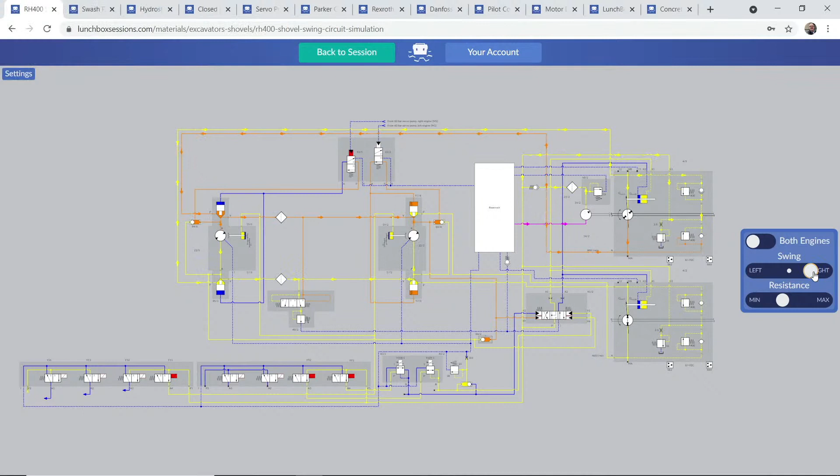Let's have a look at one right here on Lunchbox - studying a very complex hydrostatic drive. So that's one example.

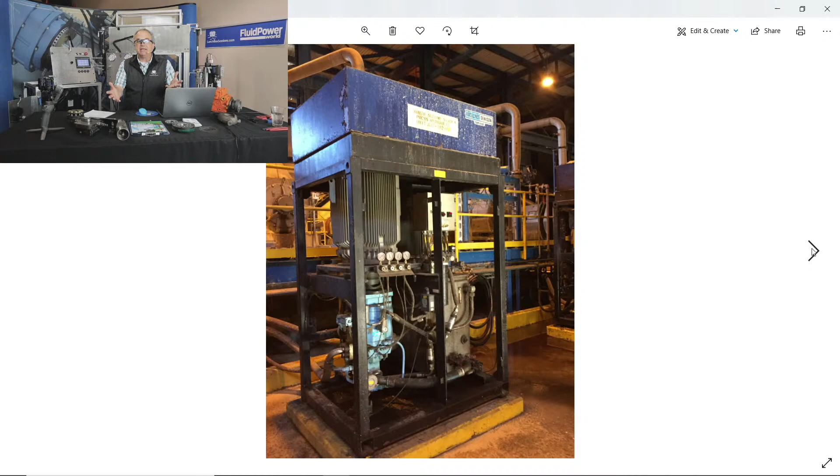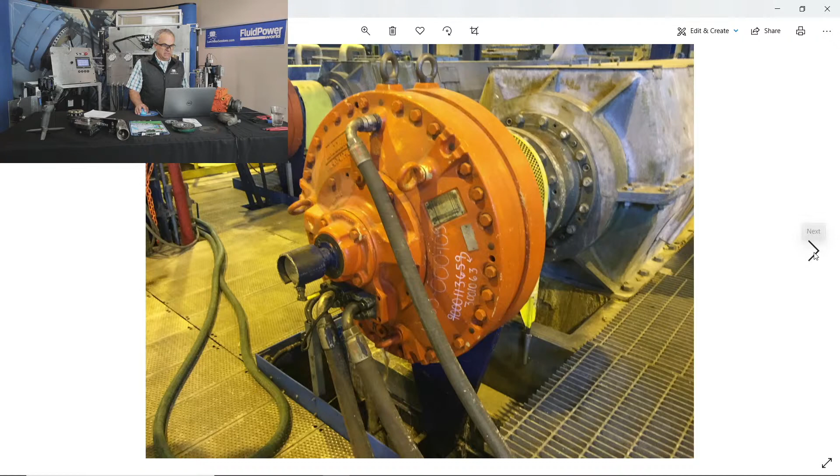So here's an example - this is from a pulp mill, for a very large machine called a pulp washer. We saw the pump, then the motor that the hydrostatic drive pump is turning. You'll see here a bank of pressure gauges with the very typical readings you see. On the right-hand gauge, port A pressure is at about 2,000 psi, giving us a clue as to which way the hydrostatic drive is turning right now - that's our working pressure port. Then return oil is coming back on the port B pressure gauge on the left side.

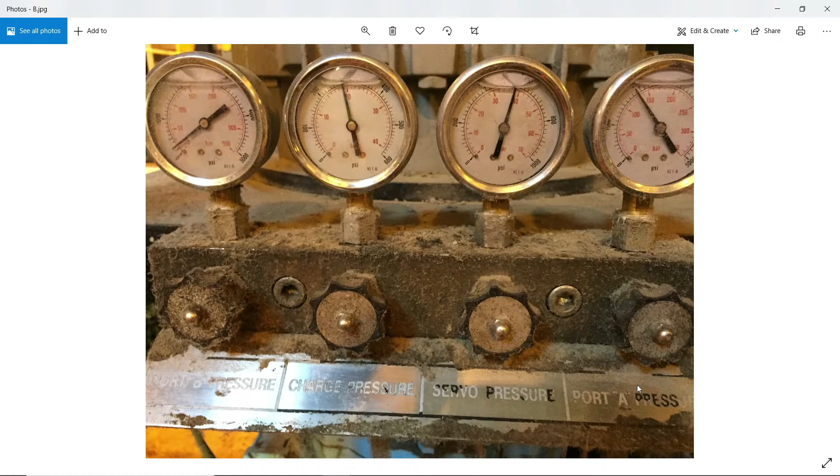And for those of you who know your hydrostatic drives well, you'll know that minimal pressure on the left side gauge for port B is not sitting at zero. That return side pressure is sitting at about 300 psi, which is coincidentally the same as the pressure value you could see in that second gauge from the left, the charge pressure gauge. Charge pressure and the return side of our hydrostatic loop are at the same pressure.

There's also a gauge for servo pressure, and we're going to get into how that swash plate is servoed into position in the big pumps. That servo pressure is right up there, close to 40 bar, approaching 600 psi. Some very typical numbers to run into, typical values and important aspects of a hydrostatic closed loop drive.

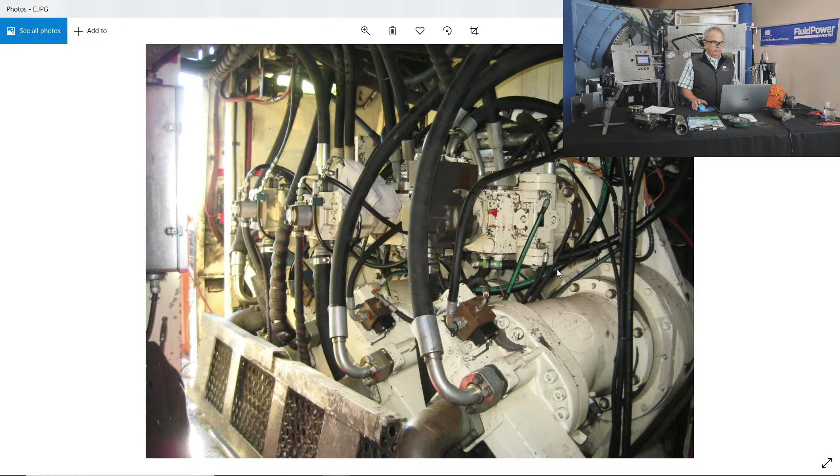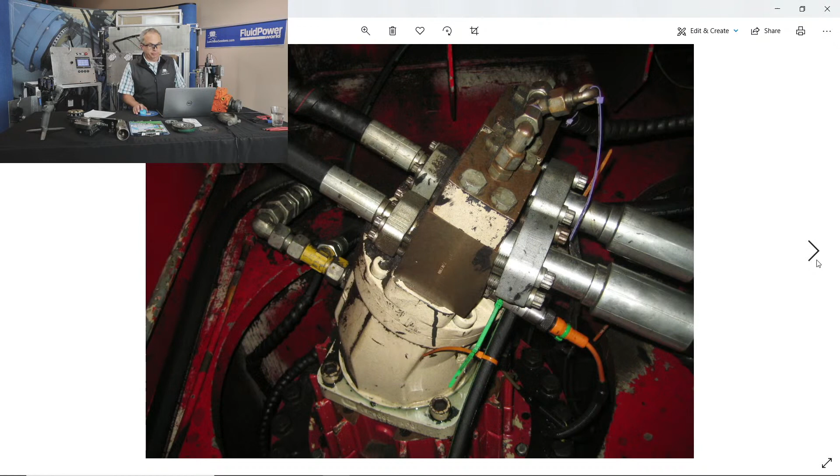Here's some photographs, the upper layer of pumps in white or beige color being used to power the swing drive on that example I was showing you in live schematic form just a few moments ago. So some hydrostatic drives have a very large scale. Here's a photograph of one of 6 swing motors for that model of shovel, where swinging the upper works of that shovel is a closed loop hydrostatic drive.

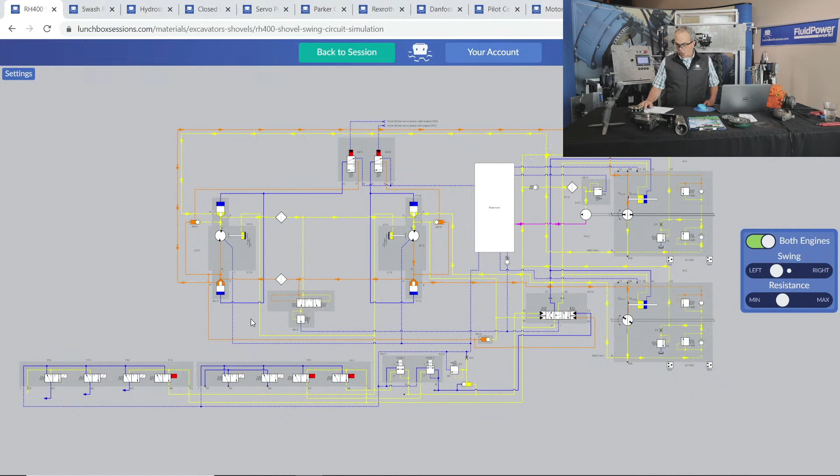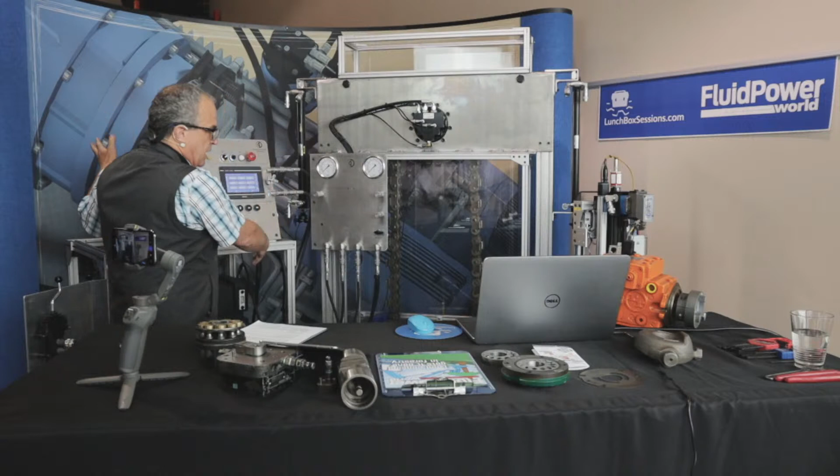All right, and so far I've been speaking to you about hydrostatic drives where the pump is always turning a hydraulic motor. You can see one here in our studio. We've got a hydraulic pump on a unit, and over here we've got a hydraulic motor that we're going to turn with the hydrostatic drive.

But here is my pop quiz question for the day, and we'll save the answer right to the very end. Perhaps some of you will know the answer, and we'll have some systems to tell us about in the chat column. Here's my question: is a closed loop hydrostatic drive always about a hydraulic motor, or can closed loop hydrostatic drives work with cylinders as well? That'll be our pop quiz question, and we'll save the answer to that to the very end of our live broadcast.

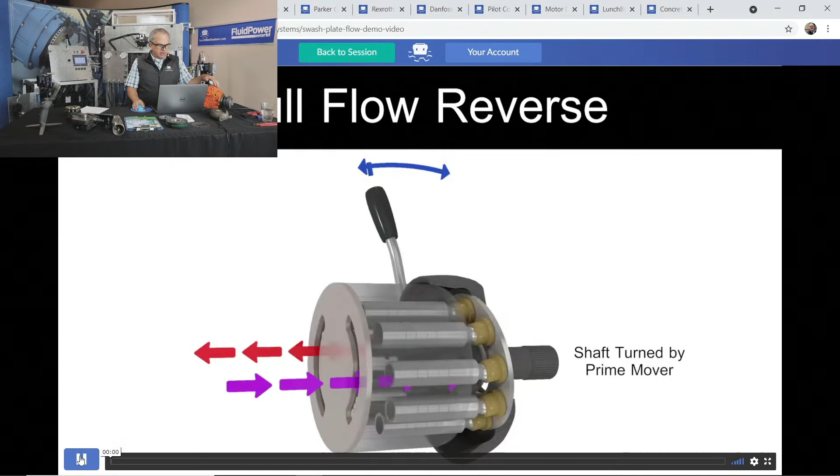But just to remind us of what actually moves the fluid and how that change in flow direction produces that very smooth forward and reverse action you get in a skid steer loader, if you've operated one of those, let's look inside the heart of the pump, just so that we remember the mechanical reality that we're working with: that cylinder barrel and its 9 pistons.

Here we are at mid-flow rate, full flow forward, back to center. Let's stop there for a moment. Pump at neutral. We're going to be talking a little bit about how much care it takes to keep a hydrostatic pump sitting in its neutral position, so that when the operator does not call for any flow, if the operator is running a skid steer loader perhaps and lets go of the sticks which return to the center position, wanting none of the wheels to be turning, how important is it for that swash plate to sit at that perfectly zero angle?

And of course, the cylinder barrel is still turning. That hasn't changed. If your engine or electric motor is still running, the pump is still spinning internally, but when the swash plate is at that perfect zero angle, then the pistons are no longer stroking back and forth from bottom dead center to top dead center.

Let's carry on and see our pump come back on stroke to produce low flow in the reverse direction. Look at those 2 kidney-shaped porting plates on the outlet of the cylinder barrel, on the outlet of the porting plate, to see that our flow arrows have reversed. Mid-flow in the reverse direction, full flow in the reverse direction. Our skid steer is going backwards about as fast as possible.

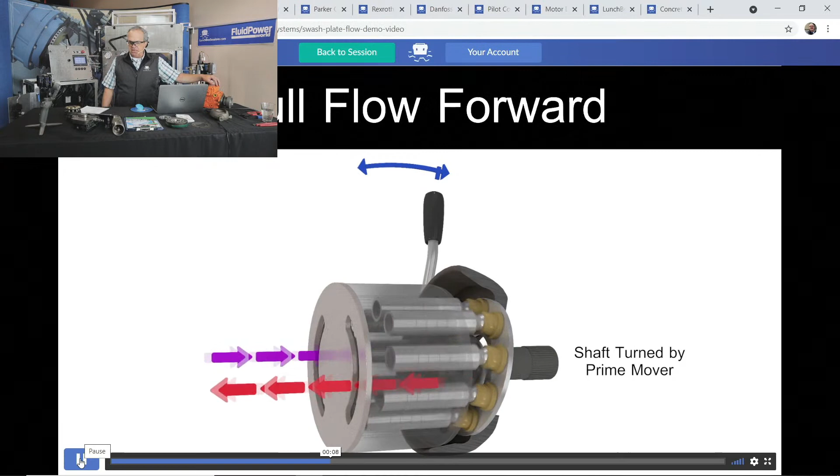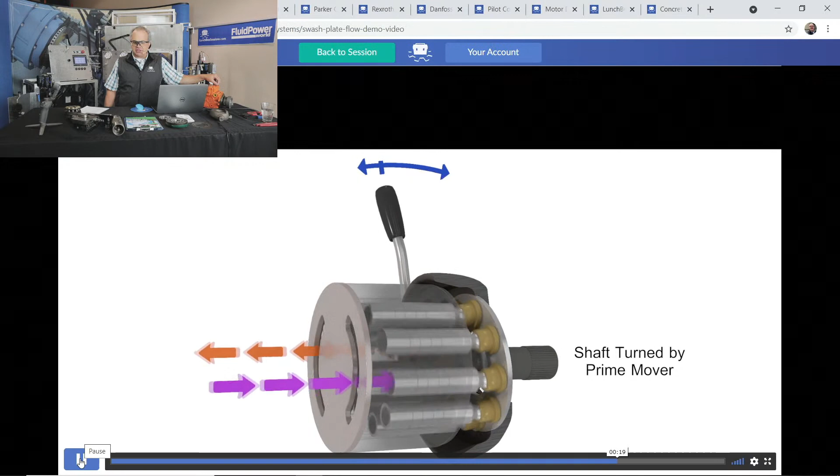Hey, we've got some additional participants from Tunisia. I think I know who that is. Oh yeah, Sammy has joined us. Mr. Sammy, welcome. Welcome participants, also additional participants from India. Good evening to you on that side of the world, it's later in the day there. Glad you could join us.

Pradeep has already said that he thinks perhaps hydrostatic drives can work with cylinders. Well, we'll see, is it possible to do that? All right, great.

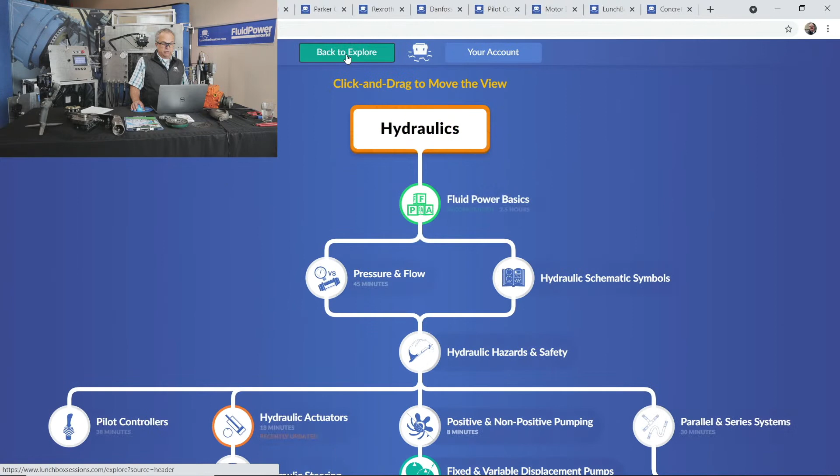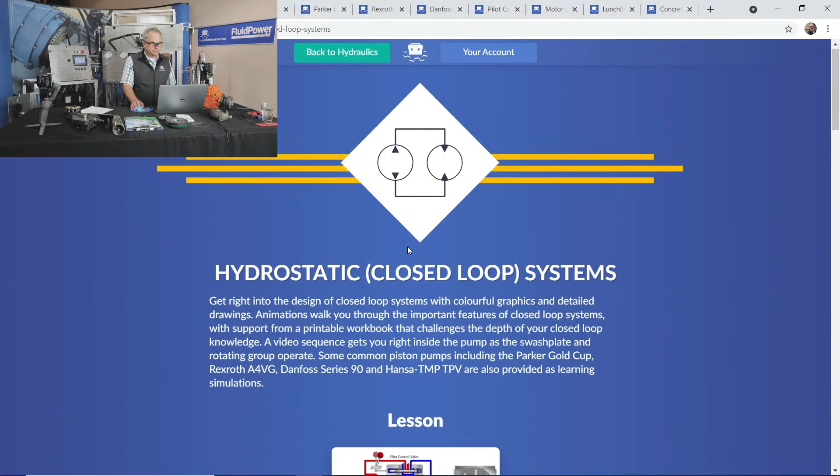Actually, what we'll do here is have a look first at a system you have access to. I'll show you where it is in lunchbox sessions if you've decided to play along. If you've got a demo account set up, that's all you need to interact with us in this material. If you're in our hydraulics menu, that's easy to find, then down low, just to the left of the middle, jump into hydrostatic drives there. Then when you scroll down past the lesson and the videos, you see our simulations, and the one I'll show you first is called the Hydrostatic Training Circuit.

Later on during this YouTube Live, that's the system that will be running live here in the shop. You'll probably also notice on our YouTube Live there are some links, perhaps on our website as well, to the actual model of hydrostatic pump and motor we chose for our demo today. But you get to run it.

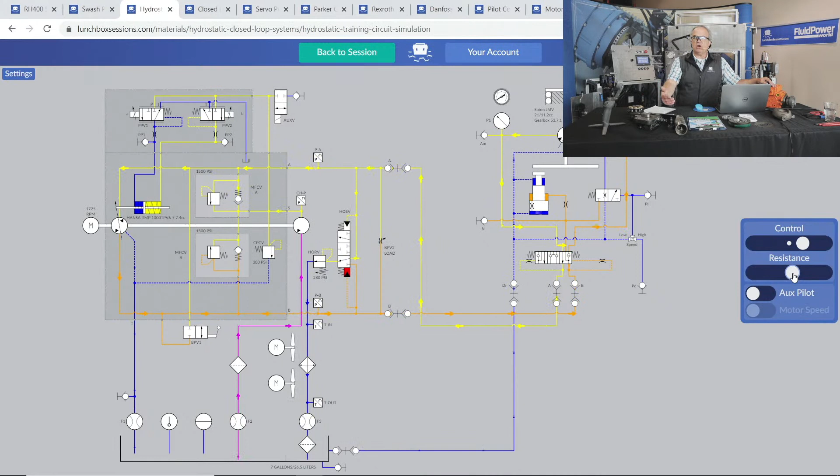You can run this system yourself by grabbing hold of that slider on the right-hand side there. You can add some resistance. Whenever you see a slider on our simulations that says load or resistance, that means you're making it tough for that hydraulic motor to turn, making it develop torque and turn a load that could be difficult, a winch perhaps, a conveyor, or a crawler machine that has to propel up a steep slope. That just introduces pressure from the working end of the system, from the motor.

So that is a hydrostatic drive that we run right here in the shop, and we'll make a bit of adjustments on it with you later on.

All right, hydrostatic drives all have in common the ability to move that controller over center. If you're watching that swash plate on the left-hand side of the simulation, close to a servo piston that's yellow and blue in color, that's moving our swash plate into position now, over to about the 1 o'clock position. You'll see that our flow has reversed, and now flow is exiting from the 12 o'clock position on the pump symbol, and our hydraulic motor is turning in the opposite direction.

You will also see the hot oil shuttle hard at work there, where you see a red pilot head pushing on what appears to be a directional valve. You'll see some flashing on and off on the solenoid that is piloting our servo piston into position to set our swash plate angle for the flow rate that we want. That flashing red is a simple depiction in our live schematics of pulse width modulation.

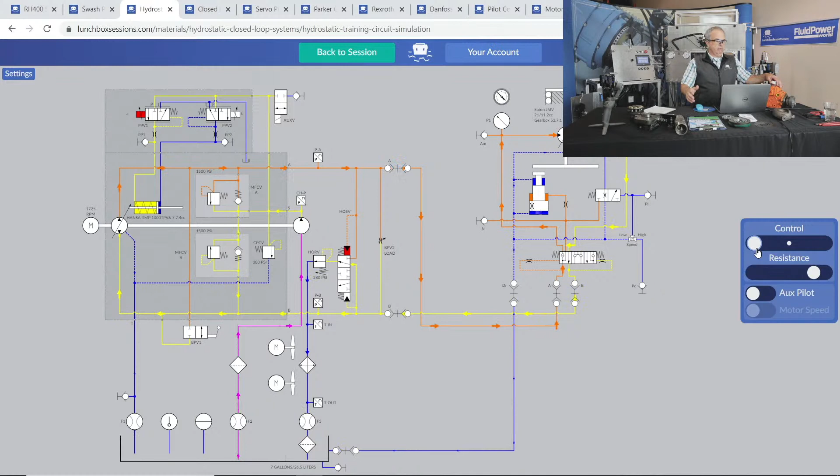Sliding that controller back towards the neutral position, you'll see in that same flashing solenoid, more time spent white and less time spent red. So a number of very typical features for a hydrostatic drive, and we'll come back to that one and do some more work with it shortly.

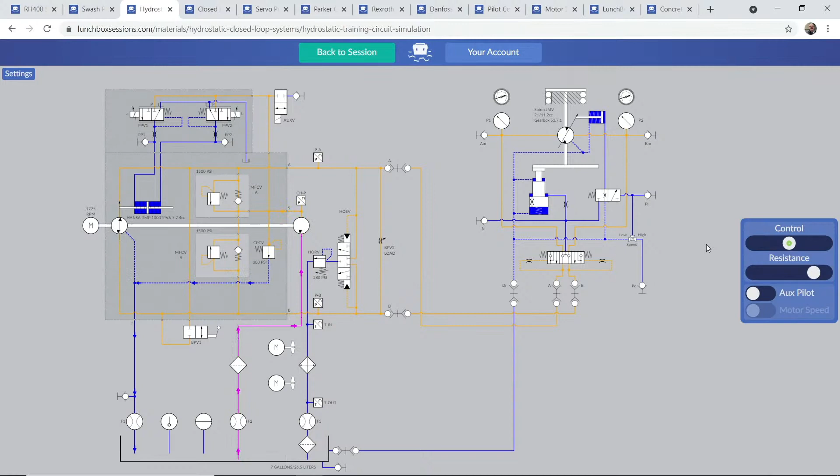Someone has already asked, Salim has asked, I'd like to know the pressure setting of an A4VG on a concrete pump. Well, I guess that depends, Salim. I would encourage you to look on the Bosch Rexroth site and look for the technical document for the exact series of pumps. That'll be after a slash in the model code. Check and see what size, what features you've got, and download that document. They've got some great documentation available at Bosch Rexroth, the makers of that A4VG pump, and lots of good materials to help you out with that.

But if you hang on a little bit, later on during this live, we will have a look at some very general aspects of the Rexroth A4VG. So do hang on to that thought, and we'll come back to it and think about that briefly. Good question. Good to get the pressure set right, and generally on an A4VG there are 2, even 3 very critical pressures that need to be set in the right order. I can't say that during this YouTube Live that we'll give you a definitive process for that, but we'll look at the pressure values in general.

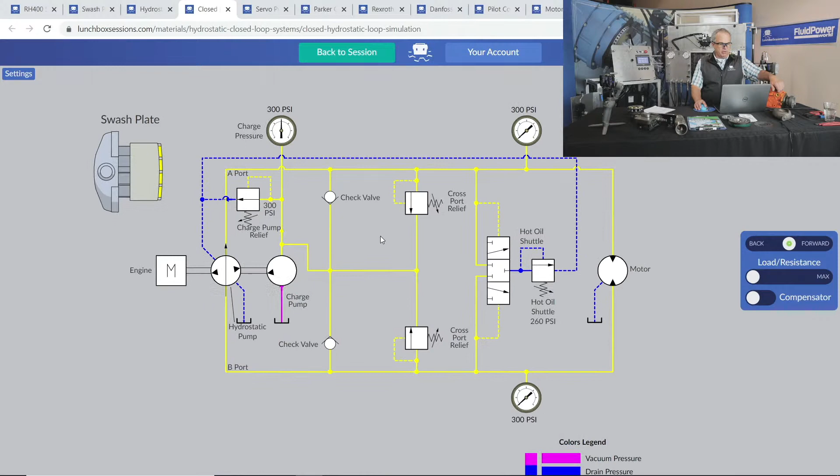So if we go back to session here, and you're playing along, you'll find out that you can also run one of our simulations by the name of ClosedLoop with hydrostatic in brackets, the very first one on our list of simulations. Jump in on that one, and I guess really this is probably one of the most popular schematics out there. In a way, it's everybody's hydrostatic drive and nobody's hydrostatic drive. It's very generic, and it's useful just to get some very basic teaching done.

So let's have a look at some of the basic features on this one, which is graphically about as simple as we can depict it. Let's move our slider here. If you're playing along, feel free to do the exact same thing with your simulation as I'm doing with mine. I'm going to move my slider for direction and flow to the 50% forward position. And that gets our swash plate moved over to about the 1 o'clock position. We're displacing perhaps at a half flow rate.

Now let's move our load resistance perhaps to about half value, just so that we have some pressure. That load resistance is all about making the hydraulic motor work hard, some counter torque, so that it has some work to do. It builds up some pressure in the system. And what you see now is a darker orange colored line from the pump at the 12 o'clock position to the motor also at 12 o'clock position, flow leaving the motor at 6 o'clock, and it's headed right back to the pump on the left hand side at the 6 o'clock position.

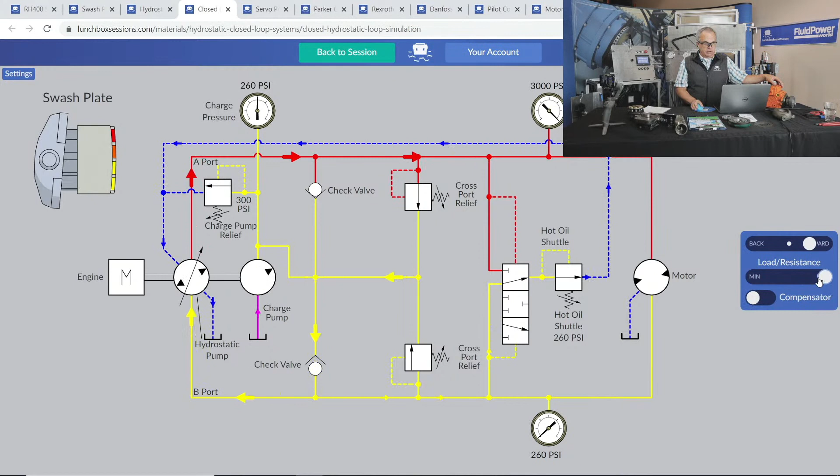Now, what do we figure is going to happen if we leave this machine parked up against the immobile object that won't move out of the way, and we leave the pump in drive? What's likely to happen? That's absolutely right, we're going to have some overheating issues. They're going to come pretty quick. So this type of system that just has cross-port reliefs, it's designed with the thinking that you will notice that you've bumped into an object that won't move out of the way, and very shortly after, you will move the machine away from that resistance and allow normal flow to resume. Cross-port reliefs can get the job done, but there's going to be overheating, okay?

All right, let me just check my list to make sure I'm following all the notes I had in mind. So that's a little bit on pressure control. We've touched upon a little bit of charge pump.

More on that in a moment.

Heat is a big issue, and we've already mentioned that. Sometimes if we go do work at a pulp mill, the maintenance superintendent will say, hope you guys are covering training on hot loops. That's another description for what they think of as their hydrostatic drive. They call it a hot loop. Is it true that hydrostatic drives tend to run warmer than many open loop systems?

Yeah, that's absolutely true, and it makes sense when you see that the fluid from the motor is constantly returning back to the pump, or at least most of it is. So this is a good time to think about that hot oil shuttle Jeff was mentioning. See that pressure on the top line, that dashed pilot line. That's not a flow line, that dashed line coming down to the hot oil shuttle. It's just a pressure line, and it bumps our hot oil shuttle down based on the high pressure side.

Let's follow oil leaving the motor, some of that oil, or perhaps more correctly, thanks to the charge pump that is pushing fluid into the return side. Which exact oil molecules are moving through the hot oil shuttle, the ones returning from the motor or the ones added by the charge pump? Doesn't matter for this point in our discussion.

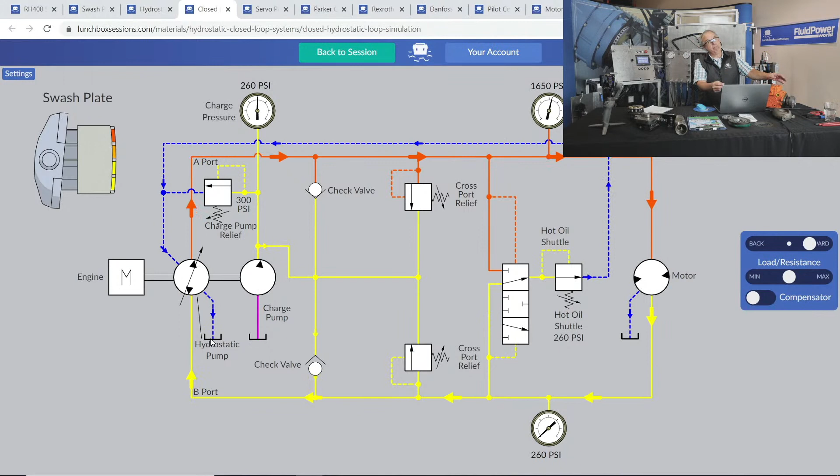While schematically it's depicted as on the bottom of the symbol, as most of you know, that final case drain is going to leave from a port on the top of the pump case. So schematic symbols and the way things get ported and built in the end aren't always a perfect match, right? It's a depiction of general flows and connections, and we don't have any port labeling. This is entirely a generic system for training purposes.

If I move my controller for the swash plate back to neutral and then move it into reverse, now you've got exactly the opposite flow action taking place. Oil is leaving the hydrostatic drive at 6 o'clock and moving over to our hydraulic motor and entering at 6 o'clock. Everything is happening in exactly the same way, just on the opposite side of the loop.

If we move that load resistance to max, bam, there's that same action again with our pressure valve, but this time the cross-port relief is on the bottom of the loop, and so there has to be two of them. Notice, of course, the check valves, which sometimes get referred to as makeup check valves. Other manufacturers refer to them as replenishment check valves. I think that's a term from the UK that's popular. All of those terms make sense.

It's oil from the charge pump being added to the return side of the loop so that there's fluid that can leave through the hot oil shuttle, and also to make up for oil that leaves the system on the case drain line of the motor, oil that leaves the case drain line of the pump, all of the losses. It's a closed loop system, and so all of the oil that leaves our main hydrostatic pump at 6 o'clock and eventually returns back into it, in this example at 12, all of that oil has to be maintained.

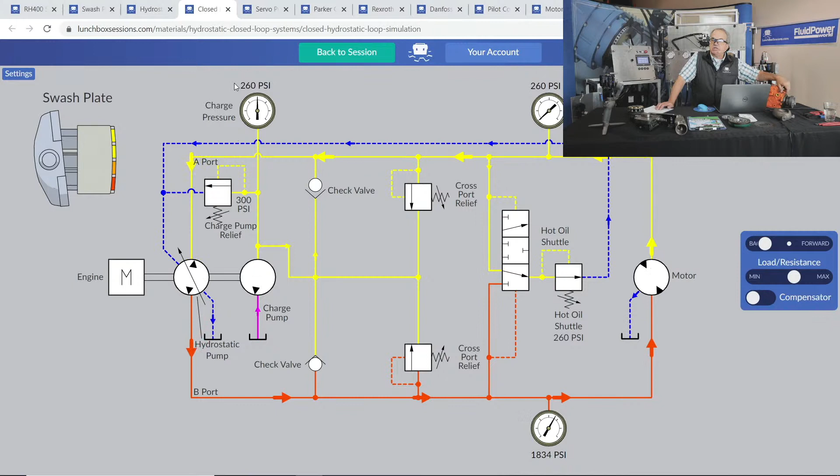Wow, yeah, so that's a really tricky discussion to have there, Dharmalingam. I'm not sure exactly how to give one answer for that. But yeah, hydrostatic drives can be very tricky to look after if there is going to be particle contamination. Probably some of the toughest systems to maintain that we bump into, from the point of view of filtration and particle cleanliness, comes in the oil field, where the coiled tubing units unplug the injector.

Which is the motor half from the pump - they uncouple it with quick couplers, and then they plug them back in when they're getting ready to do a service job, and it's a great time to introduce contaminants as those quick couplers come together, and now perhaps you've got contaminants stuck in the hydrostatic loop. So in machines like that, you will generally find very large elements so that the pressure drop through the filter isn't too great, but very large filter elements that are filtering one direction at a time - so two sets of filters, one on the A and one on the B loop.

Otherwise, a lot of case drain flows as they go back to tank should not be filtered, lest you get in the way and cause some back pressuring with that filtration that could cause damage to the pump or the motor. But then you may choose to have one of the most effective filtration systems out there, which is called a kidney loop - drawing oil from the tank on a special gear pump, usually whose only job is to do filtration, perhaps cooling, and circulate oil from the tank through a cooler and a filter and then right back into the tank, getting some assistance with fluid cleanliness in that manner.

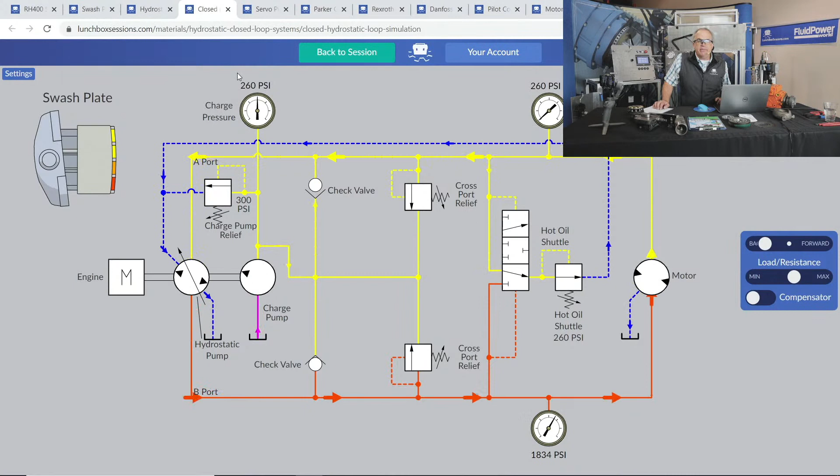And so then one does have to work at making sure cooling is taking place.

Jonathan was asking, what is the directional control valve for?

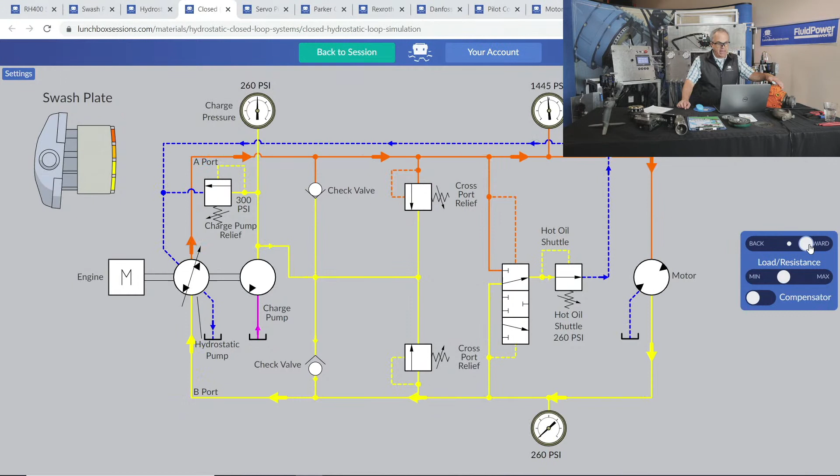Going back to our simulation, you're seeing that 3-port, 3-position directional valve there - that is the hot oil shuttle. It is bumped into position, piloted by the high pressure side, and flow exits from the low pressure side. That valve is just there to select the low pressure side of the hydrostatic drive loop and allow oil from that side to connect to the hot oil shuttle, allowing flow to go back to tank for flushing, cooling, and filtration. I hope that's the directional valve you were referring to, Jonathan.

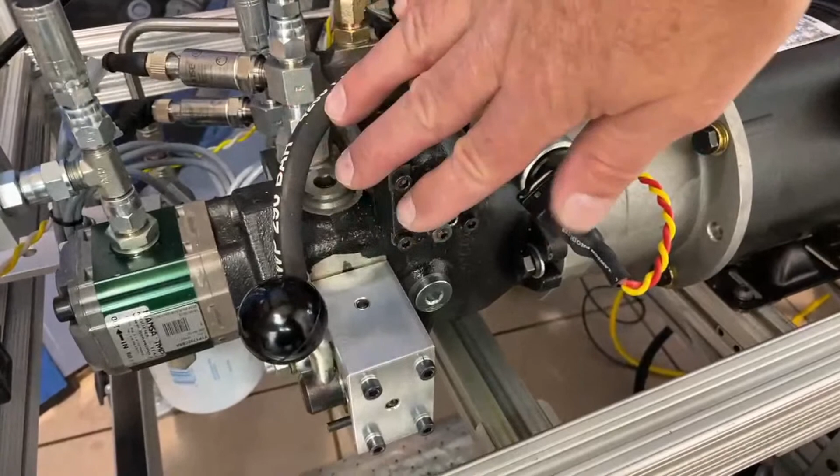Actually, ours does. I'll briefly jump over to look at our hydrostatic system. This is a pump I'm going to be running here shortly - this is the hydrostatic drive in our shop. It's just a wee baby that does 7.4 cc's per revolution at maximum on the main piston rotating group, with a gear-based charge pump.

This lever here is the tow bypass. If I push down on that lever, A and B ports are directly connected together. So if the machine is broken down but the pump is still connected to a hydraulic motor, the motor could turn and circulate oil through a bypass valve at the broken down engine and pump end. That will not try to turn the rotating group, the cylinder barrel, which will then not try to turn the prime mover and cause all kinds of resistance and damage. So that's a bypass option.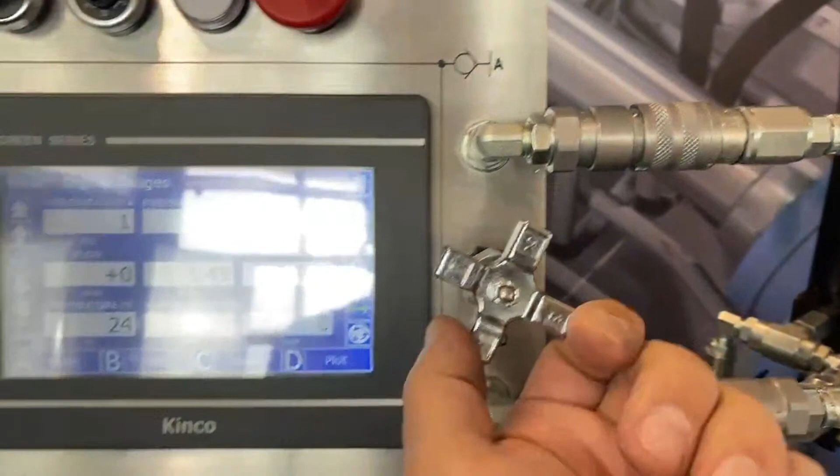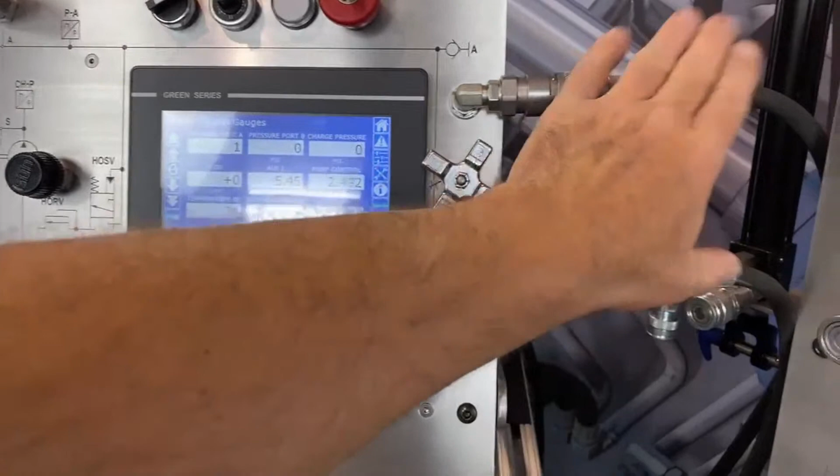I better put it back up into normal, otherwise I might forget later when we run that. On our training system, here's our main A port outlet and B port line that move over to our motor, but we also added a needle valve to give fine control to allow flow, which lets us do some work with a hydrostatic drive even with our hoses uncoupled and actually come on stroke. So yeah, the tow valve can be an important element, most certainly. I hope that's what it was.

Jeff is asking some questions about filtration - where's the best place to put them on a closed loop system? In line, yeah, so on those hydrostatic drives I was telling you about for coiled tubing injectors in the oil field, they put one on each side, generally located fairly close to the pump side of the hydrostatic loop. They've generally got that filtration happening as oil leaves the pump and heads towards the hydraulic motor. Oil on the return side bypasses the filter with a bypass check valve that's typically in that type of loop.

Brock Godfrey, hey, from Australia, welcome. Good to hear from you, sir. Good morning, Carl, he says. Love to hear your thoughts on... Yeah, it's morning for me. What time is it for you? My goodness, must be late there.

Love to hear some thoughts on performing volumetric pump testing on closed loop pumps, particularly in the field, still in the machine. Yeah, well, that can be a little tricky to do, can't it? Especially since if you have a hydrostatic drive that is turning in both directions, with so many swash plate control devices typically on a commercial grade pump. We haven't volumetric tested hydrostatic drives in the field per se. We test a lot of open loop pumps for volumetric in the field.

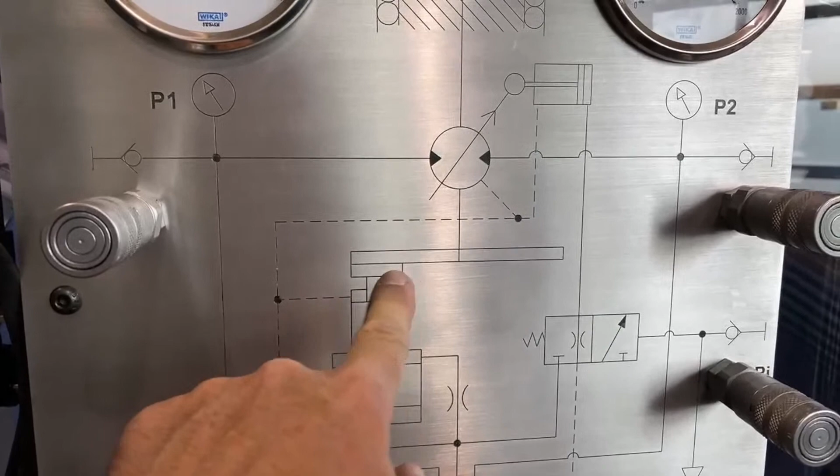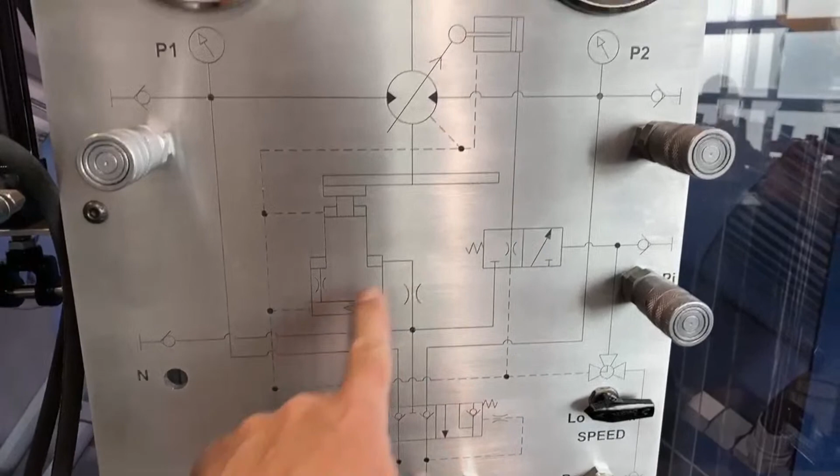We've got that on our motor unit here, where the brake releases automatically—I think at about 100 psi on ours. Here's a depiction of our brake shoe against a wet disc pack inside our motor. This is the manufacturer's exact symbol for this particular Eaton JMV that we put on here, and that releases automatically. So when you come down to lower pressures, the counterbalance valve closes, the brake is vented, and the spring applies it. There's a combination of things happening between the counterbalance valve and the brake release to set our motor free.

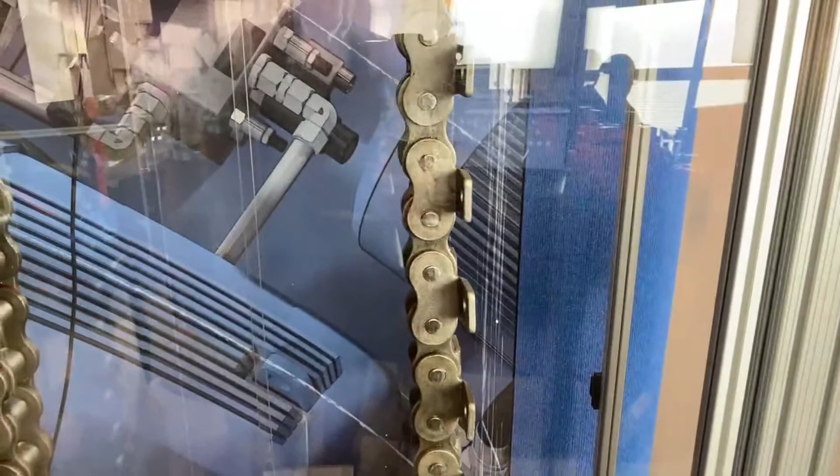Otherwise we've got this 250 pounds worth of steel blocks, but they're only loaded onto half our chain. We can stop the load halfway down, and gravity doesn't interfere, due to the spring-applied, hydraulically-released brake that locks on as our directional valve comes to the center or neutral position. All right, there you got a little spin-around view.

Okay, let's see where we're at here time-wise. Time is flying quickly, I think. Just going to go through my notes quickly here and see what topics we were covering.

So overheating with cross-port relief valves on the more industrial-grade hydraulic pumps is dealt with during pressure conditions by adding a feature we might call pressure compensate. If you're playing along, go ahead and hit the button that says Compensator. And what that did—wow, what did that do? That added a lot of stuff.

The sequence valves look very much like pressure relief valves, don't they? Except that generally sequence valves are used where the outlet of the pressure valve is not on its way back to a low pressure or atmospheric vented tank. So these sequence valves are up to something else here—they're now going to be used for a different effect.

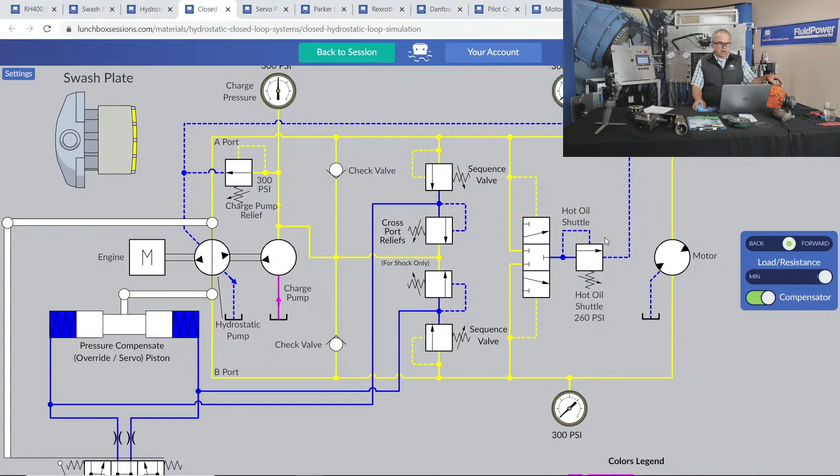So again, put your hydrostatic drive in forward. Oh, I had my load resistance all the way up. Put your hydrostatic drive, say, halfway forward, and then let's slowly overload the motor and see what happens. What you'll notice is that the sequence valve on top is popping open and shut. That popping open is sending fluid through a special passage inside the pump—yes, now we also have to add a servo piston.

The very same servo piston that moves the swash plate into position for the rate of flow and motor speed that you wanted is now being used as part of the maximum pressure control scheme. Instead of venting or cross-port flowing the entire flow rate of the pump through a spring-loaded poppet, which would just cause a lot of heating, it's now instead pressuring the opposite side of our servo piston and taking our pump to the neutral position.

As soon as the pump reaches its perfect zero swash plate position, keep in mind our operator control lever, or the control system in an industrial plant, was still asking for forward flow. So that flow request was still there. But now that we're off stroke temporarily with the sequence valve popping open and pushing a pressure value to that servo piston, our pump swash plate, when it reaches zero, is essentially not pushing any fluid. Internal clearances in the system will take that pressure down a short way, and as soon as that pressure drops a little, the spring in the sequence valve will slam it closed once again.

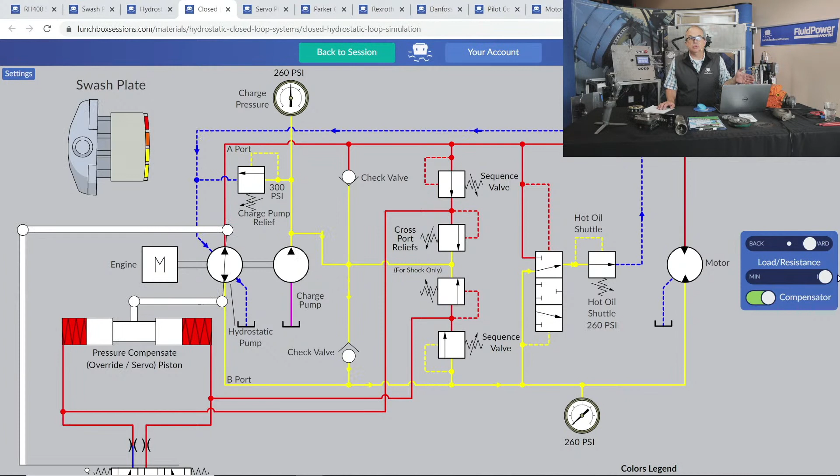So that is what it means to add pressure compensation, and of course, what's the value to that feature? The value is that we get rid of a terrible heating problem. If there are going to be some significantly long moments where we're in a motor overload condition, this is the more energy efficient way to handle it from the prime mover—diesel fuel or electricity—that you didn't buy simply for the purpose of overheating your hydraulic fluid.

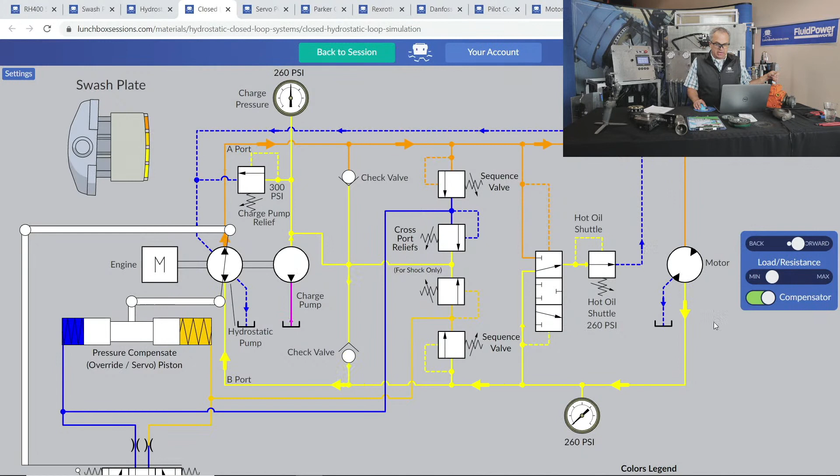It might be good to point out, if we go back to simple ideas, when we put the controller back in neutral, watch that bottom gauge on the return side of our hydrostatic loop. Watch that value, 260 psi, and as we detent in there—ka-chunk—in the center position, we find out the pressure comes up to 300.

Well, that makes sense, doesn't it? With the same pressure on either side of the loop, our hot oil shuttle went to the center position, blocking access to the 260 psi hot oil shuttle. So now we are completely reliant on the charge pump's relief valve inside the pump. We better have that charge pump relief valve in there, or that little shaft in the middle will snap in half—it's always a fixed displacement pump.

So that explains why our charge pressure gauge here at the top and all of our loop pressures are now sitting at 300. Those three should be equal when the pump is in neutral and the neutral or centering adjustment is correct. More on that in a few minutes.

Let's have a look at some of these common features as they show up in other common manufacturers' models. You may not have access to all of these today, but the Rexroth A4VG was mentioned. Again, this is just a very generic depiction for general learning only. Please work with the manufacturer or your hydraulic system integrator if you're going to make adjustments to the good handful of adjustments or more available on the outside of the case of these pumps—what we're covering here won't be enough to help you do that safely and correctly.

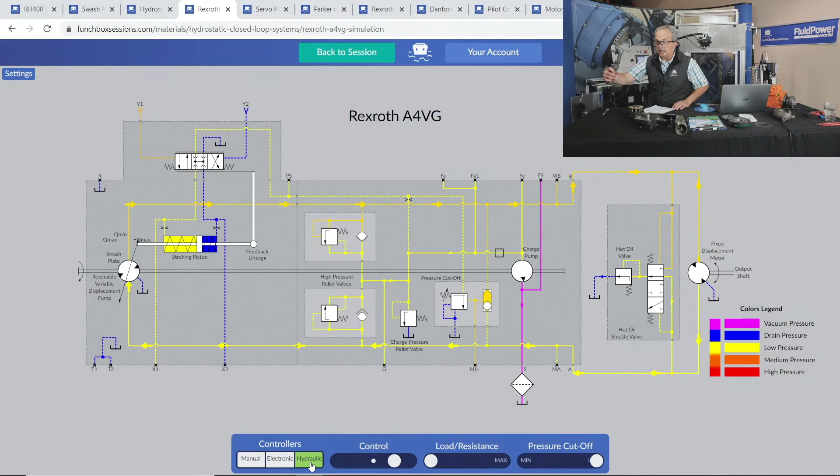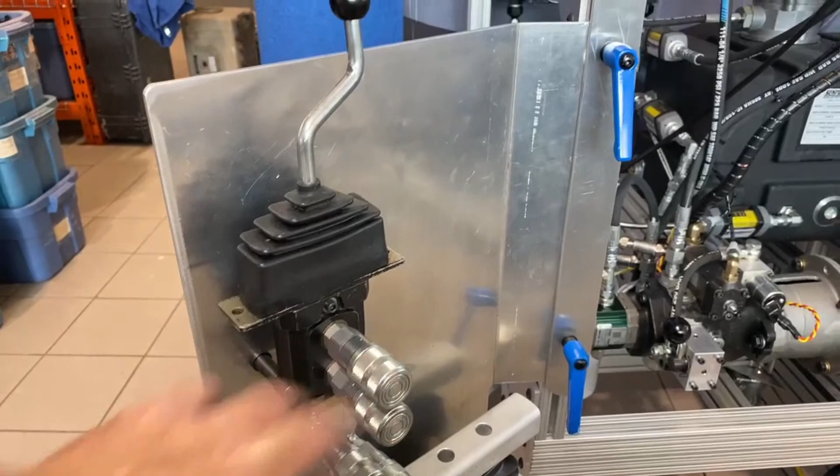Here's one on our stand that you could have a look at. This is a pilot controller. We could have taken the pilot controller ports and connected those to X1 and X2, and then we would pilot our pump with hydraulic pressure instead of with the electrohydraulic solenoid valves that are there. So that's another option.

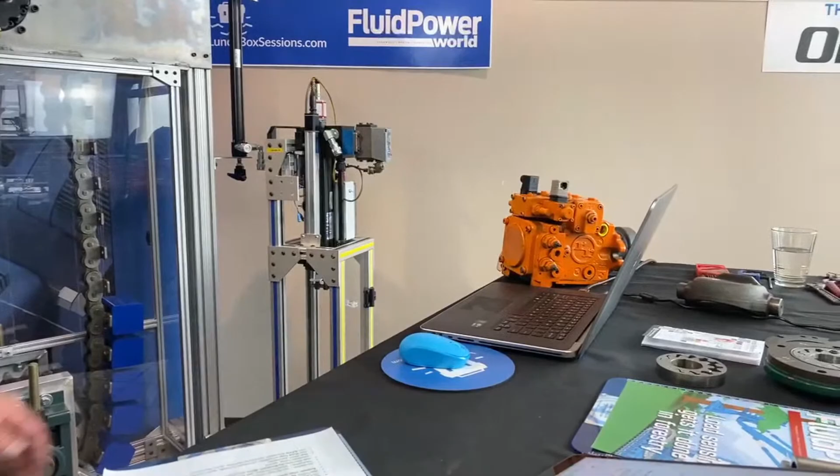There's usually a number of ways of piloting that servo piston. But in the example of the A4VG, you see the high pressure relief valves in the middle here. Let's get some color on that top line, some pressure color going. So those are your cross-port relief valves. They are generally set anywhere from 300 to 500 psi higher than whatever pressure the valve is bringing you.

That's the compensate feature, and in the Rexroth pump that's over here, pressure cutoff. So look at the symbols you've got if you have this model of pump. There'll be a little shuttle valve. Now, this is not the hot oil shuttle, not at all. It's just there to select the higher pressure of whichever side of the loop, the hydrostatic loop, is doing the hard work.

And then if we overload, that'll pop our pressure cutoff. This time, instead of pressuring the opposite side of the servo piston with full servo pressure, it bleeds it off and lets the springs inside the servo piston return the pump to its neutral position. Very similar scenario. You'll see the hot oil shuttle there. All of the regular features hard at work.

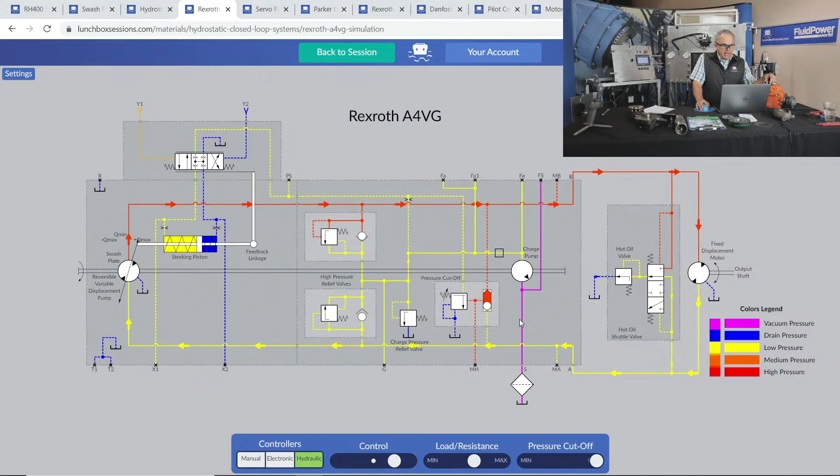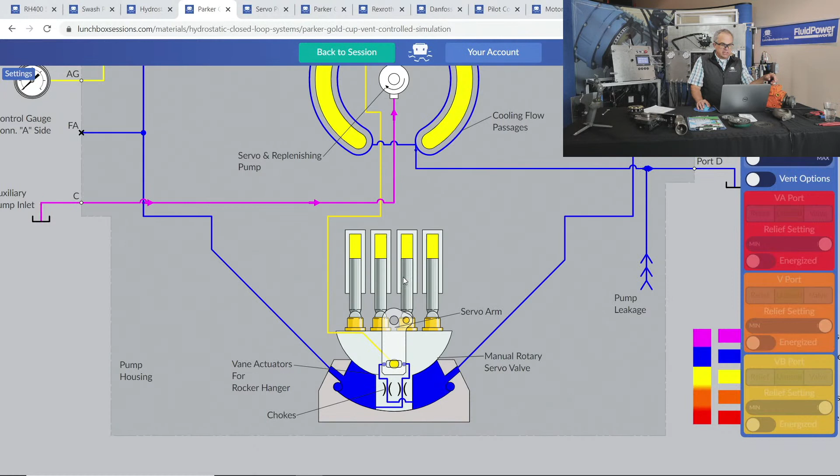So you're seeing some pistons there. You'd see maybe 4 of them if you were to cut away of the 7, maybe, but we can't show them spinning well in this view. So imagine that the cylinder barrel is still spinning, but pump control is handled by a bit of a different mechanism, a crescent-shaped chamber that's sealed up with a vane type of construct.

And then there's a little item called a servo arm in the middle. How that servo arm is moved is a topic for another day. But there, again, is the same type of scenario for moving the swash plate into position to produce flow either A port to B or B port to A.

Again, if we were to load up the pump, there are a number of valves. We're showing them in the cutaway style, the way Parker did for the Gold Cup cutaways. Some people call that the brain box at the back of that pump, with all those slip-in cartridges hard at work.

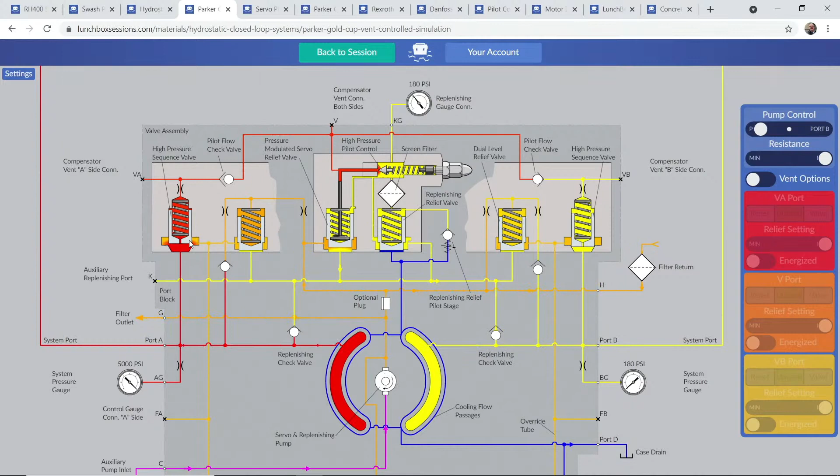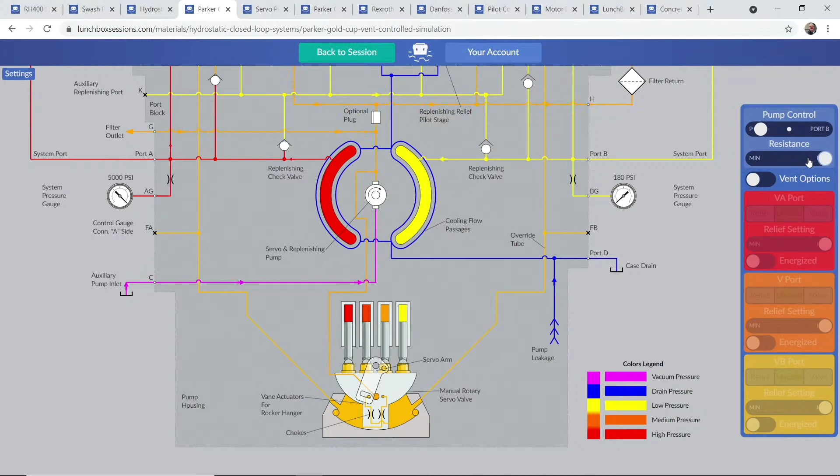So there is that high-pressure sequence valve that is triggered and has sent oil down what we call the pressure override tube, into the opposite side of the vane chamber, to bring the swash plate back to an off-stroke or centered position, even though the servo arm is still in the position the operator wanted it. It's a little involved for us to explain, but I'll come away from maximum resistance at the hydraulic motor, and we'll see the pump comes back on stroke.

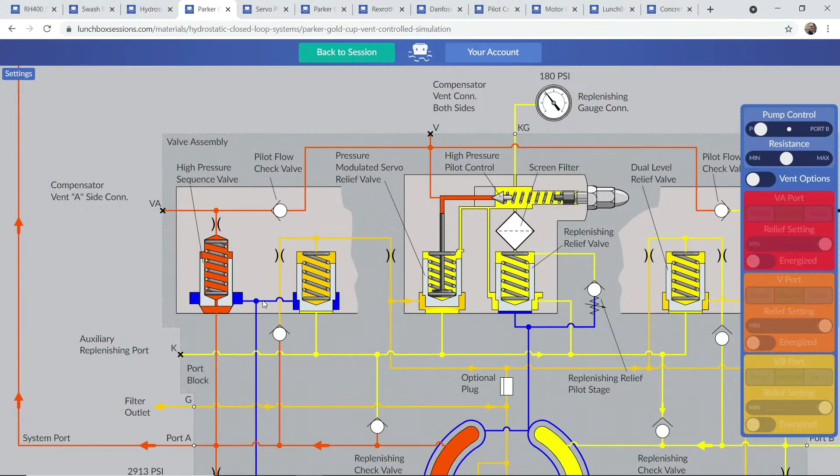But still, cross-port relief valves—they're just referred to as a dual-level relief valve in this pump—just pop open for a very brief time if the pressure spike is more than 500 psi higher than the setting of the high-pressure sequence valves that trigger that compensate action.

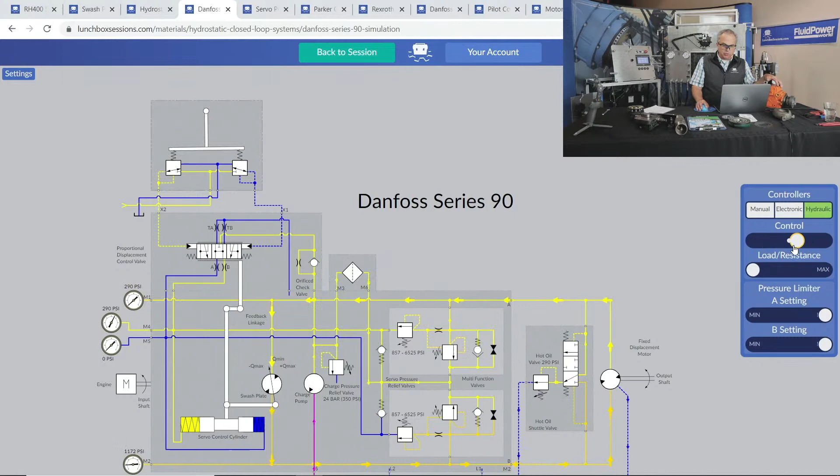Okay, there's so many things we could cover, and we won't have a lot more time. But let's just move over to Danfoss Series 90 as another very good example from industry. Let me put the hydraulic piloting on so you can see an example of the external pilot controller I showed you briefly on our stand, which just pushes on the main control valve bolted to the side of the pump. Otherwise, you see all the same features.

Oh, the tow valve, right—the towing valve was mentioned earlier. The multifunction valves in the Danfoss 90 come with a wrench setting that you can release on what is otherwise the cross-port relief valve. You have to check their manual to know which wrench flat you're turning and the jam nut, but here it is—here's that butterfly shape.

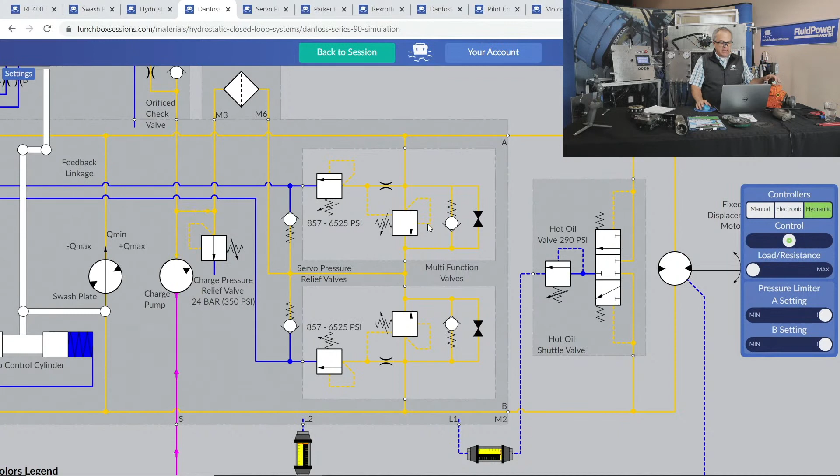That basically lets you open up and create a complete cross-flow path so that if you have to tow your propelled machine a distance because it broke down, your motor could spin freely and circulate oil through the towing valve component of those multifunction valves, allowing you to rescue your machine if it broke down. So those are some really typical scenarios there.

Well, let's go back to some questions there. What are major factors for increasing the life of pumps for a hydraulic system?

Sundarapalli, that's a great question. Keeping temperatures under control is key, so keeping track of that. Making sure that the fluid levels are topped up is important. Making sure that solid particle contaminants do not get into the system. Making sure that water does not get into the system. Making sure that pressures are checked from time to time to make sure that maximum pressures are still set correctly.

These are major factors that if the pump gets regular checkups in that way, and shaft to prime mover alignment is maintained, all of those critical mechanical aspects can quite often make a good quality hydraulic pump last many decades if it gets that kind of tender loving care.

Consult all your pump factory notes and an expert who knows your particular model of pump if you've never done this before. So I'm just going to uncouple my hydrostatic drive from the motor, from the pump.

So I literally have a system that is blinded out. There's nothing wrong with that. That's just starting up in neutral.

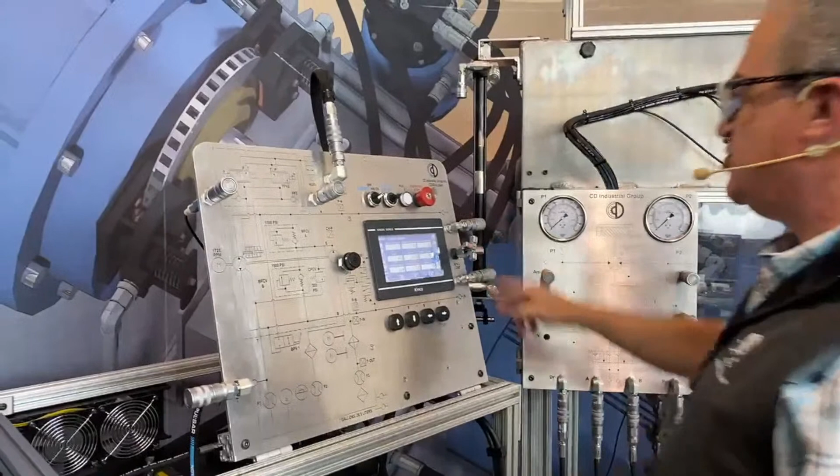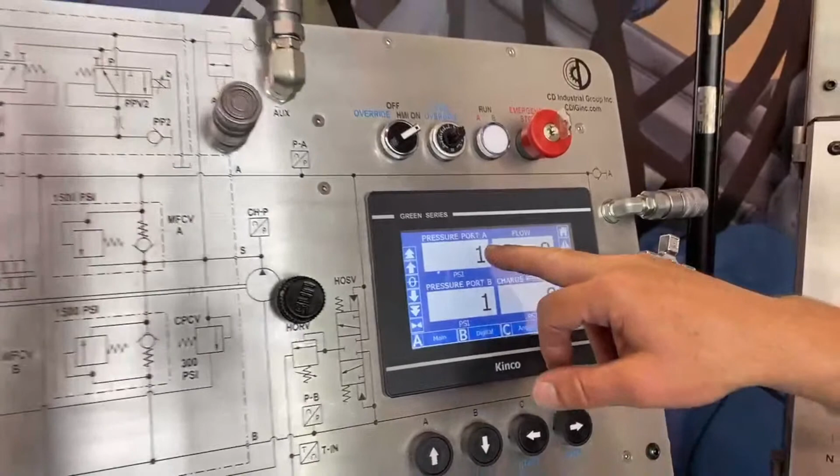And I'm going to switch to my very basic pressure gauges. Our pressure values are going to read on an HMI screen. So we're going to see port A pressure, and we'll look at port B pressure and see if it's equal with our charge pressure when we're running.

And so we fired up. We'll just give it a moment to sort of come to an ambient state. Port A pressure and port B pressure are pretty close to 298 each. Charge pressure is 297. Oh, looks like our port B pressure is turning out to be just a few psi higher than port A and charge. It looks like port A and charge are the same.

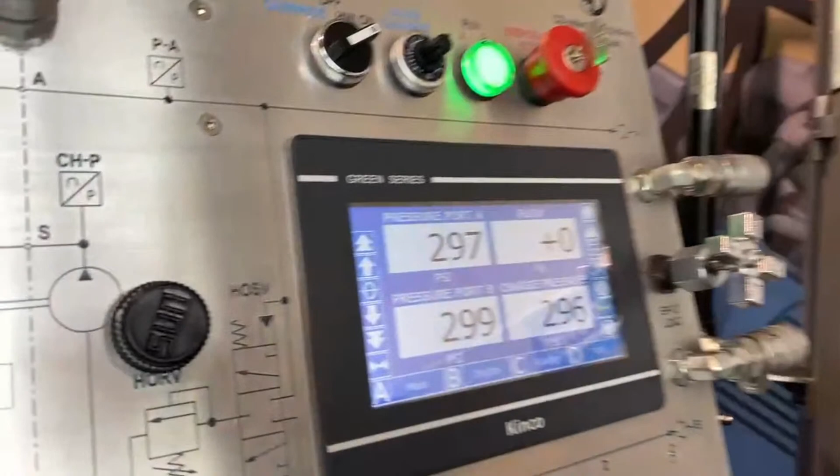Well, let's do some work with this. So on our particular system, this requires the use of a hex key, and I like to check and see exactly where I started. I'm at about the 1130 position. Keep track of that. I've got to back off a jam nut. This is in the similar position on some other types of pumps as well.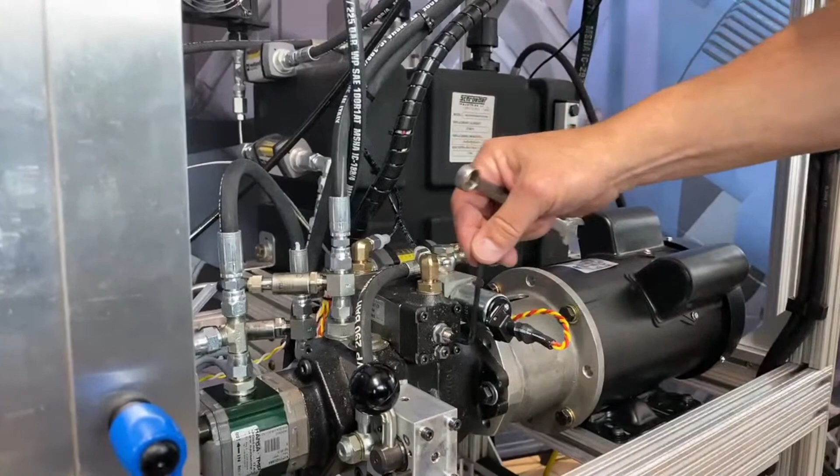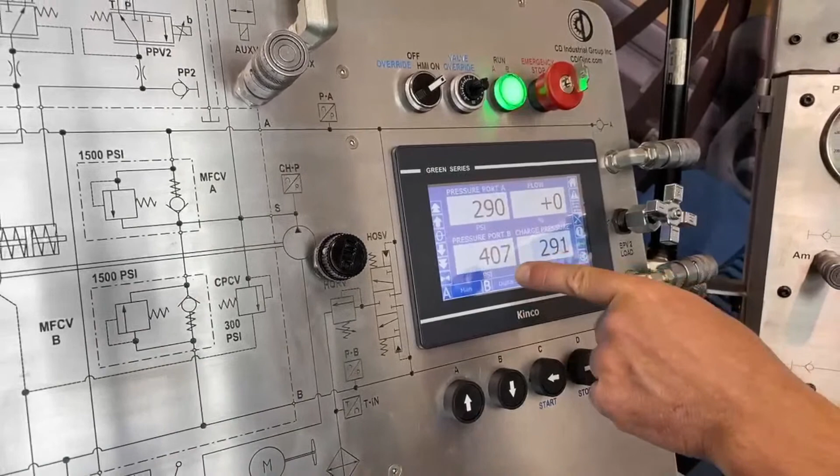And if I was to move over, say, to this 1 o'clock or 2 o'clock position, look what's happening here. I have put an uncomfortable bias on the spring for our servo piston. On our port B side, it's actually attempting to come on stroke because of the way we've unbalanced the servo piston spring.

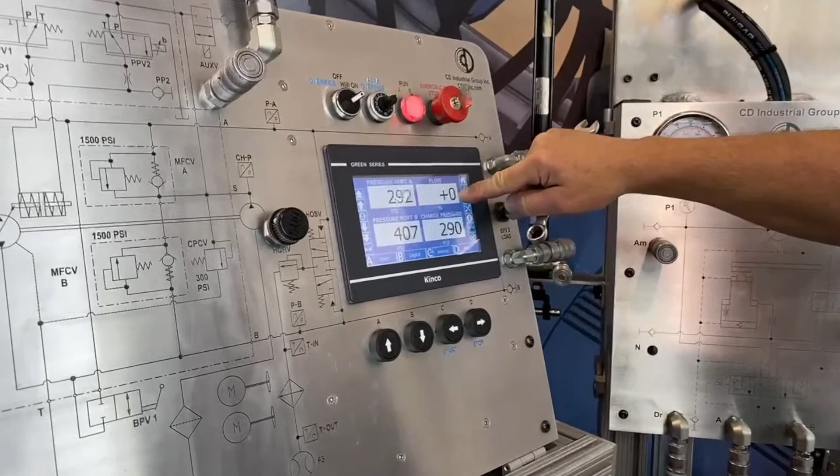Port A, port B pressure, those should be the same because I have not asked for any flow. I have not operated the joystick, or my process controller hasn't asked for flow in either the A port or the B port direction, and yet my pump is attempting to provide a B port flow and pressure.

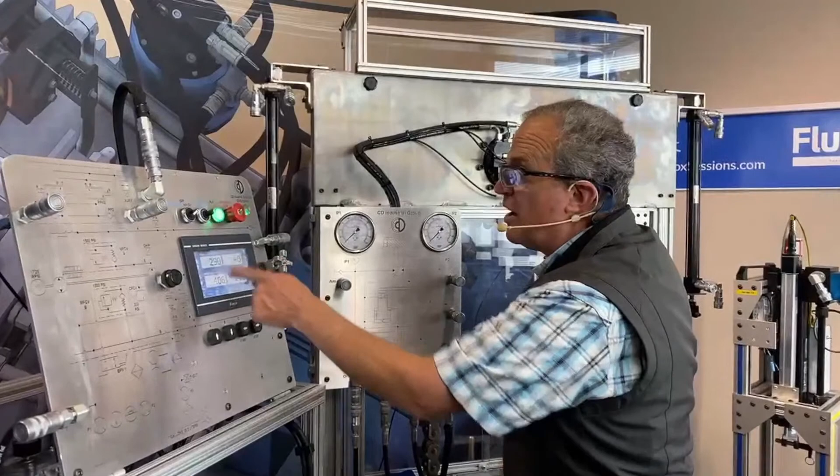So my pump is now not in what manufacturers would call a good nulling state. They would call it a neutral point. They'd call it a centering point in some manuals. Everything in hydraulics seems to have three names out there in industry.

But let's reset. Let's get things back to normal. And so I'm going to watch the gauges, and it's not very far that I have to turn to get things back to normal, right? I'm just going to turn my Allen key and see if I can get port A pressure, port B pressure, and charge pressure all to be exactly the same.

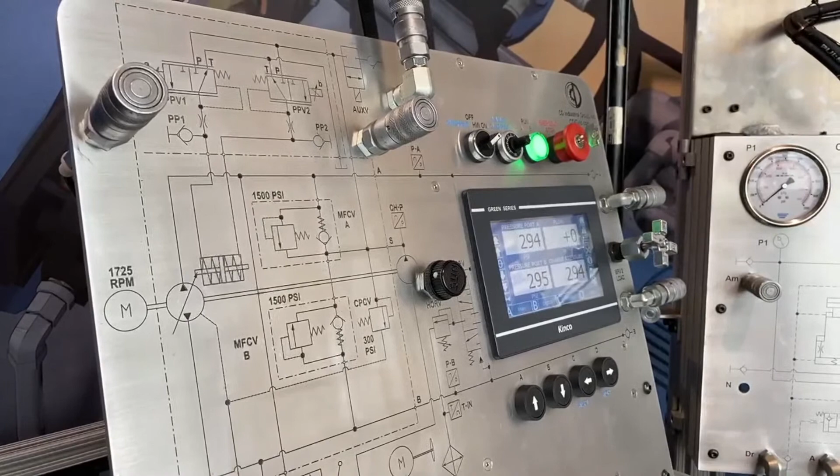Of course, we're in a learning situation here in our lab, so we've got things well controlled. Make sure that you understand how to have your machinery in a safe condition for this. Work with a technician who knows your model of pump very well the first time this adjustment is made on your machine.

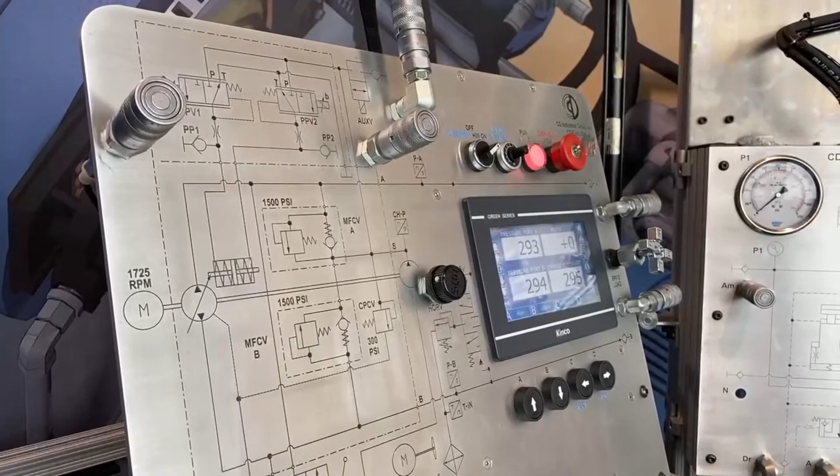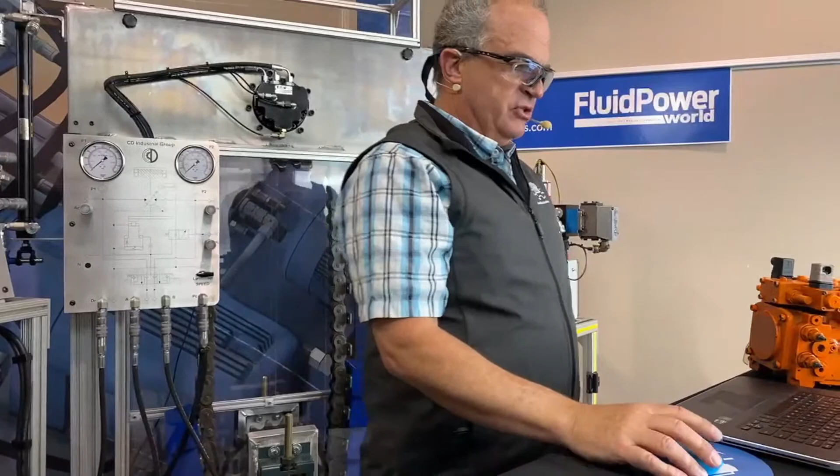Might even be the factory that you wish to speak to, and I've got my jam nut locked, and I'm back into a good neutral state. I hope that's helpful. Let's see, we're 10 minutes after the hour, so we'll start winding down.

Could you elaborate on aeration detection in a hydraulic circuit? Well, in a hydraulic circuit in general, quite often a gurgling noise and a lot of foam in the tank is an indication that you've got aeration. Cavitation also makes an interesting noise, but will not produce a layer of foam in the tank as the fluid returns. That's probably all I have to say about that one at this time.

Peter's asking, how do you troubleshoot to determine whether an unbalanced servo piston is either by hydraulic fault or mechanical in a hydrostatic pump, when the servo control is left in neutral? Wow, yeah, Peter, that's a really good question.

I would attempt to do the nulling or neutral setting that I just did, and then spend a lot of time observing that machine in both directions to see if it stays at that null setting. If it turns out that after cycling drive, forward, reverse, back to neutral, it moves out of null again, having just made that adjustment, that might be an indication that there's something mechanically sticking, some contaminants in there. If you couldn't achieve nulling and get it locked in and see things return to normal right after, that would likely be a good indication there.

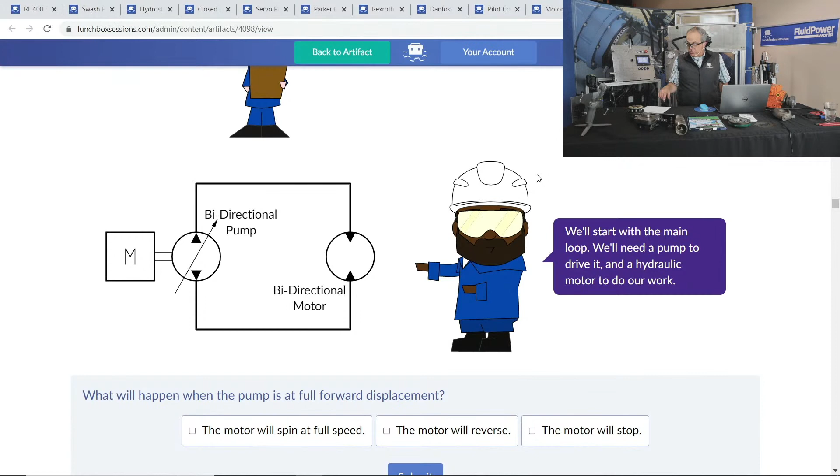Mark your calendar. Counterbalance valves, motion control valves, pilot operated check valves. We'll do things in simulation mode, and we'll do things that are live.